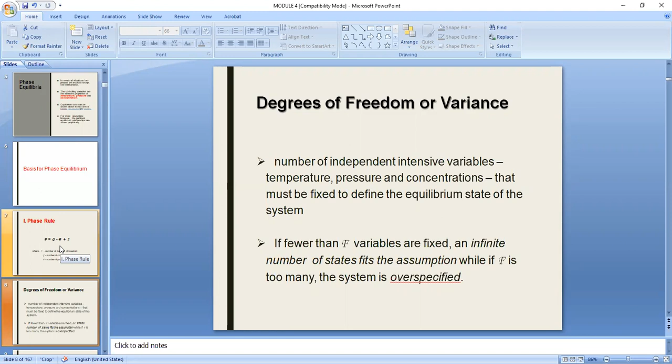Now, while if F is too many, the system is over-specified. So we seldom encounter situations wherein your F is less than or greater than the computed F. Most of the time, we have it given already as to whatever is the computed F. The number of degrees of freedom, or independent intensive variables, really is equal to the computed value based on the phase rule.

Now, for a two-phase system, which is the case in our separation process—we don't cover multi-phase systems—variance is always equal to 2, which is also equal to the number of components in our system.

For example, most of the time the problem has the pressure fixed or specified, and one of the concentrations, either the liquid phase or the gas phase concentration, is given, then the problem would ask for the other one. So if you're given the liquid phase concentration, the gas phase concentration would be asked, or vice versa. In this sense, the number of independent intensive variables is equal to the computed variance.

So in terms of whether it's possible to determine the solution to such a problem, the answer is, of course, yes.

Now we have Raoult's law. This is for ideal systems only. It gives you the relationship between mole fraction in the liquid phase, represented by X, and the partial pressure of A in the gas phase, the small p sub A. Now in some books, the capital P sub A has a naught, so P sub A naught represents the vapor pressure of pure A. Sometimes it's also represented by A prime, so P sub A prime in that sense.

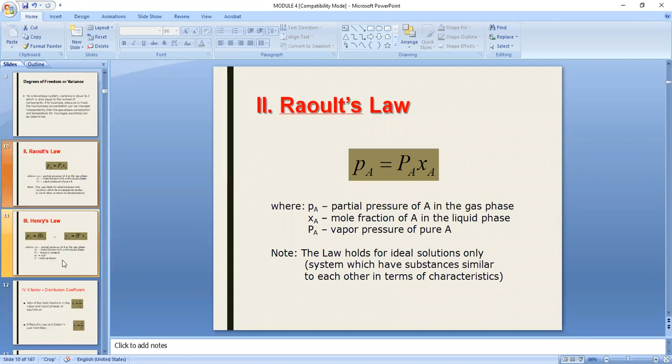Now, if the system is not ideal, we have the option to use Henry's law, which, in lieu of the pure vapor pressure of component A, uses the Henry's law constant. This can also be taken from a property table based on the given system, and using the operating temperature or pressure, whichever is given, we can get the Henry's constant. After that, we can use this equilibrium equation in the problem together with the material balance equations.

Now, from Henry's law, we can derive the relationship between mole fraction in the liquid phase and in the vapor phase, XA and YA. Our Henry's law constant need only be divided by the total pressure of the system. If the problem is silent about the total pressure, it's automatically assumed to be atmospheric pressure. So dividing the original equation of partial pressure and liquid phase mole fraction of component A by the total pressure leads to this equation.

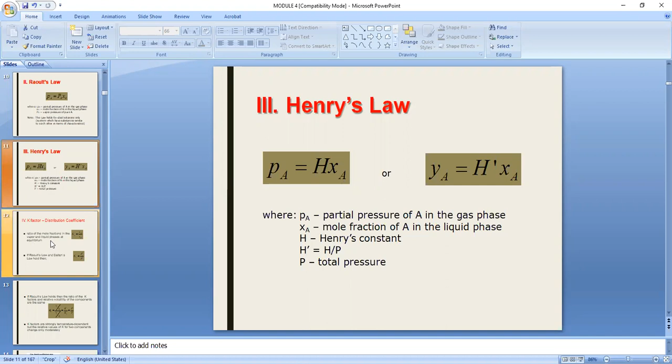The next concept is the K factor, or the distribution coefficient. You'll encounter this in McCabe. This is the ratio of the mole fraction of a particular component—in this formula, component I—in the vapor phase over the liquid phase. So the numerator is the vapor phase composition, and the denominator is the liquid phase composition. Note that the subscript E denotes that these are concentrations measured at equilibrium.

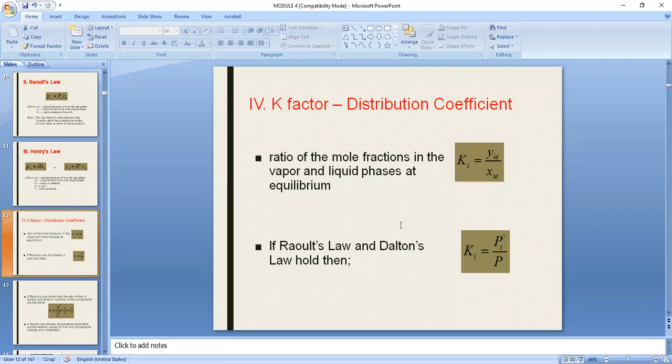Now, if your system is ideal, there's another formula you can use for the distribution coefficient: the ratio of the pure vapor pressure of component I, denoted with a prime, divided by the total pressure of the system. In this case, you're determining the K factor, or distribution coefficient, based on component I.

Again, if Raoult's law holds, we have this relationship between the K factor, or the distribution coefficients, based on components I and J. If we take the ratio of these K factors, that would also be equal to the relative volatility of our system, the relative volatility of component I with respect to J.

If we change the manner of writing the subscripts, say writing J first followed by I, you also interchange the subscripts here and here. Because the manner in which we write the subscript for relative volatility really matters in terms of the formula being used. So for relative volatility of component I with respect to J, if it's alpha sub JI, that's the relative volatility of J with respect to I, which is only the reciprocal of the previous relative volatility.

So you have ratios again of the mole fractions measured at equilibrium. I did not write 'at equilibrium' again since it's implied. It could also be the ratios of the two K factors, or distribution coefficients, or even the ratios of their pure vapor pressures. For this, you really need to know the temperature. K factors are strongly temperature dependent, meaning they change with temperature, but relative values of K for two-component systems change only moderately, or the change is very negligible. So we still consider it to be a constant for a two-component system.

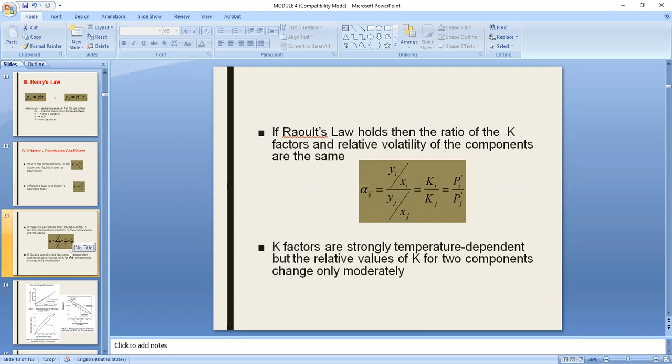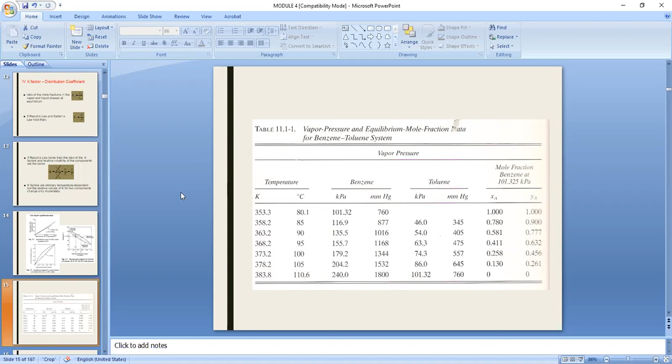So you can either use tables, equilibrium diagrams, or equations. That way you can get relationships between the variables that you want, so you can use these relationships in your material balance equation whenever the need arises.

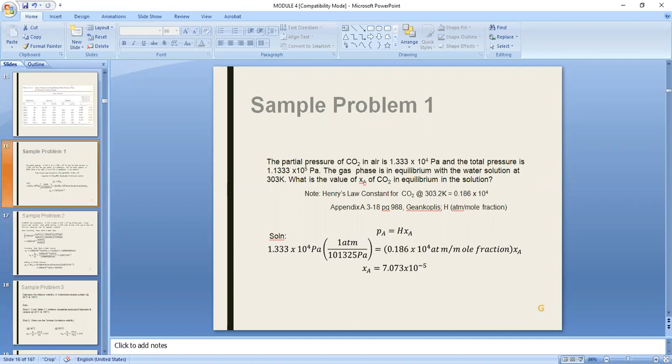I have sample problems here. I'd like to go back to the sample problems when I'm done with everything in this set of slides, that way I've covered everything. So we'll just skip it for now and go back to it when I'm done with the rest.

Now we go to gas absorption and stripping. When we speak of gas absorption, it's the unit operation in which the soluble component of a gas mixture is dissolved in a liquid - your feed is the gas and your solvent is liquid. The inverse of gas absorption is called stripping or desorption. The transfer this time is from the liquid using a gas as solvent, involving the transfer of desired volatile components from a liquid mixture into a gas.

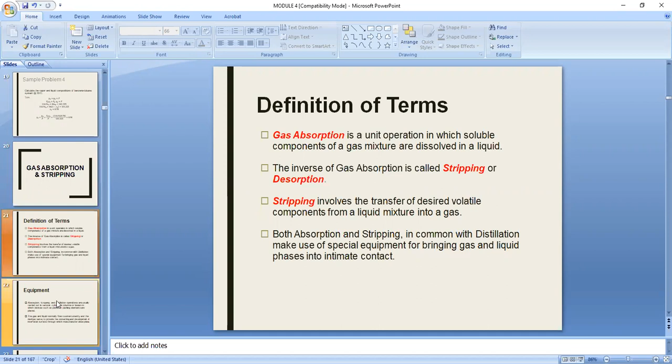Both absorption, stripping, and distillation have something in common in that they use special equipment to bring the gas and liquid phases into intimate contact. So these columns in which these unit processes are carried out can either be in the form of packed columns, tray columns, spray columns, or even bubble columns, all of which are present for the three processes. But oftentimes it's the packed columns and tray columns that are being used. We'll review them later as we reach that particular portion.

Absorption, stripping, and distillation operations are usually carried out in vertical, cylindrical columns or towers in which devices such as plates or packing elements are placed. The gas and liquid normally flow countercurrent, and the device serves to provide the contacting and development of the interfacial surface through which mass transfer takes place. In the process of interacting the phases, there is this development of the interfacial surface where real mass transfer occurs. If the manner of contacting, or the time of contact, is insufficient, there won't be establishment of this interfacial surface, which will of course make separation not 100% or near 100%.

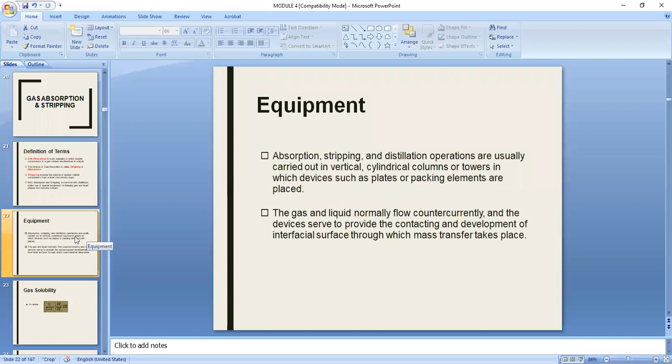Now, for gas solubility, this is an equation taken from the handbook. This allows you to determine the solubility of gas in water. So if the solvent is not anymore water, this particular formula will not work. So this is only for solubility of a particular gas in water.

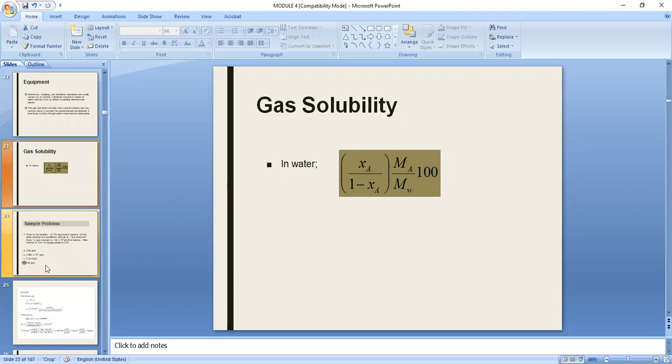So you have here mole fraction of gas A in the liquid phase, and you have the molecular weights of A and that of water. Okay, so how soluble a particular gas is in water only depends on its mole fraction in the liquid phase, because the molecular weights you can anyway take from a periodic table. And we have sample problems here, I will discuss it as well later.

Now, for the equipment selection, plate columns may be economically preferable for large-scale operations. So take note of this, and they are needed when liquid rates are so low that packing wouldn't be adequately wetted. So there won't be enough contact because the liquid rate is small or low, so your packing material will not be sufficiently wetted. So if it's not sufficiently wetted, then there's not enough interfacial surface that will be established for mass transfer to occur.

And that is why for large-scale operations, it's the plate columns that are preferred. So plate towers may have a better turn-down ratio and are less subject to fouling by solids than are packed towers. Now, these packed columns usually are chosen for very corrosive material.

So though plate columns are preferred for large-scale operations, if the material to be handled is corrosive, or if the liquid tends to foam, or it could either be a small or large diameter tower involving very low allowable pressure drop, so there's a need for the operation to be operated at a delta P which is small, then we can use the packed columns.

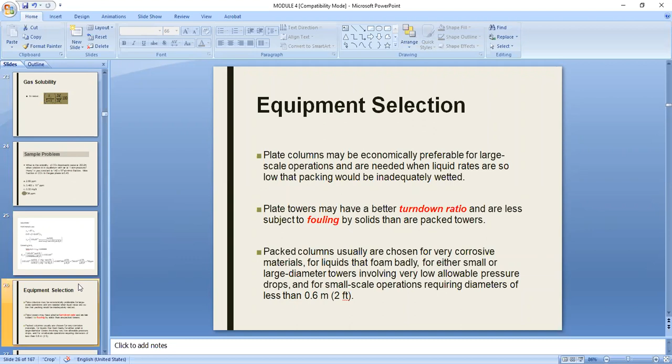So since the plate column is for large scale operation, then the packed column is for small scale operation. Okay, so the diameter is even less than 2 feet. So you can imagine a column with a diameter of less than 2 feet. So take note of the application of the two types of towers or columns for gas absorption.

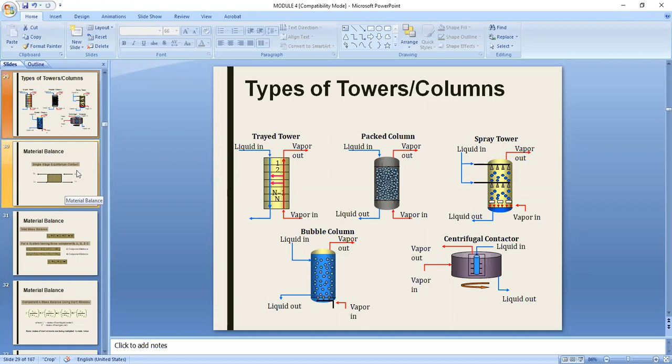When you do a material balance in the case of gas absorption or stripping, if it's just single stage, this is how we label it. Of course, we have L0 and V1 here, and we have V2 and L1 here. The phases that are leaving a particular stage are the phases that are equilibrated. Take note of that. So it's V1 and L1 that are equilibrated when they leave stage 1, or this particular single stage system. Your V2 and your L0 are the feed phases.

So actually your feed is really V2 when you speak of gas absorption, and L0 is your solvent. Vice versa if we talk about stripping. Your feed in stripping is the L, and your solvent is the V.

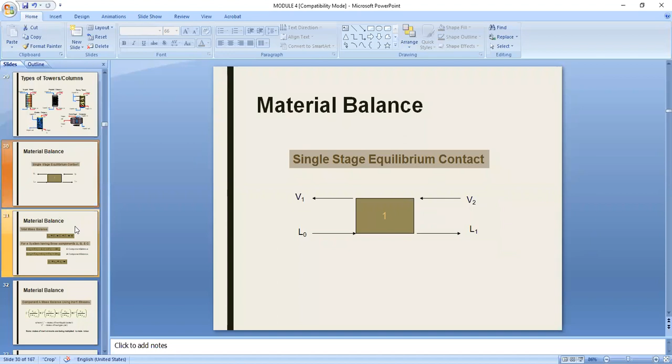Now we do material balance, very simple. You take the sum of the phases that enter your equipment, and you take the sum of the phases that leave your equipment. And we label the resulting phases when these two are mixed as the bulk phase M, where your interface is developed, where real mass transfer occurs.

Now, if you're going to make a component balance, you can only make it based on one component at a time. So if it's based on component C, then let it be C. You cannot make another component balance based on A, because you won't be able to solve whatever is required by using more than one component balance.

The component balance equation, in terms of pattern, takes it from the total mole balance—sorry, not mass balance, but mole balance, because we're using moles here. So your L and V will be multiplied to the mole fractions in the liquid and vapor phases, represented by X and Y. So if your component balance is based on C, then your subscript will have the C. If it's based on A, your subscript will have the A, followed by the number of the plate or stage where this particular phase, where our X and Y is multiplied to, is coming from.

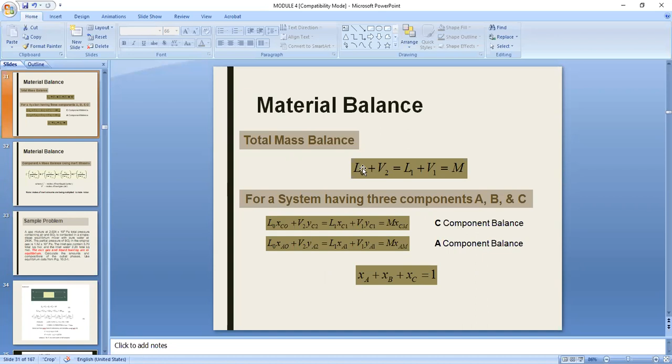This is very beneficial in problems where the original component balance equation will not help us determine all unknowns. So sometimes we use the total mass or mole balance equation, and this one. It's a mole balance, not a mass balance, because we are using moles here in gas absorption.

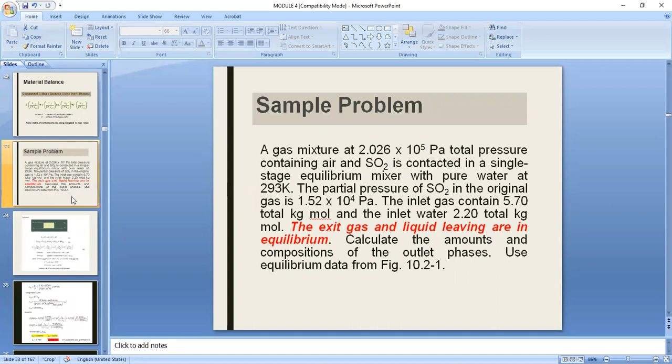This is a sample problem and that's the solution, so we'll skip that and go to multi-stage processes. The material balance shown to you was for a single stage process, but the same principle applies for a multi-stage process.

So you have your stage 1 to stage capital N, and the small letter n refers to a particular stage in our multi-stage process. Notice the labeling is the same as in single stage processes. The streams that leave a particular stage have subscripts equal to that stage number.

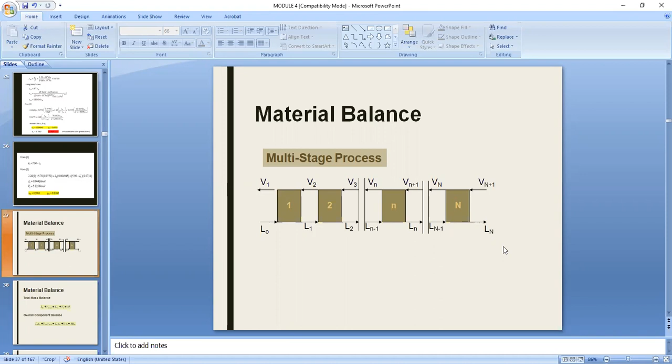These particular streams are said to be equilibrated. So looking at it, if you do material balance, you will have L sub O, V sub N plus 1, and V sub 1 and L sub N. Your component balance would still be patterned after your total mole balance.

Now for a tray tower, this is taken, I believe, from Geankoplis, in the manner the figure is represented. Look at the manner in which the streams are labeled. So this is your material balance in an absorption tray tower. Look at how the phases are labeled and the corresponding mole fractions. So this is our tray tower.

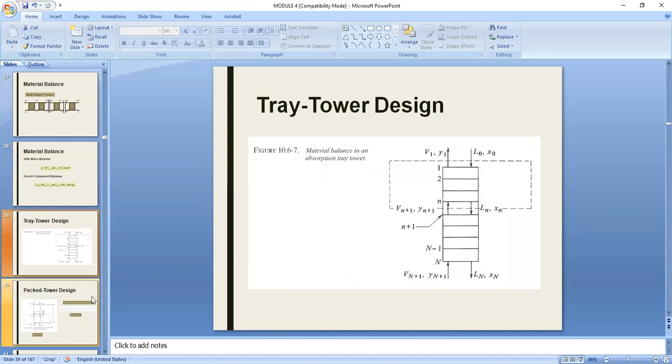Now if it's a pack tower, it's the same as the tray, same labeling, as you can see here. But this time, I took it from Geankoplis again, but he used the representation of McCabe. So Geankoplis also uses the McCabe equation, especially if he intends to use the component material balance utilizing the L primes and V primes, so that he only has to take note of two subscripts in the X and Y.

That is only 1 and 2. Notice at the bottom of the column you have 1, and at the top of the column you have 2. This is how McCabe represents it. This equation is found in your handbook, and I've indicated it here. For the rest of the equations, where I haven't indicated the equivalent in your handbook, please take note of those equations, or I hope by now you've already marked your handbook with the equivalents found in Geankoplis and McCabe, since we're using both.

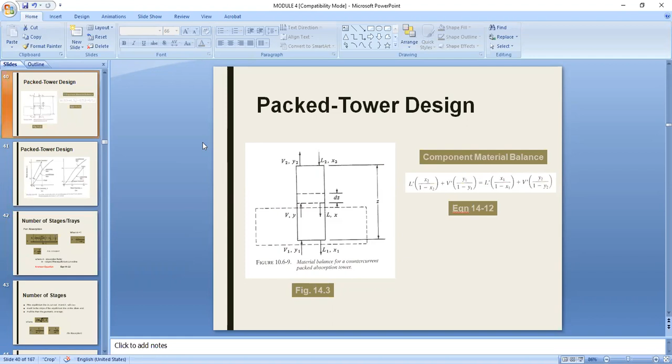Now, for pack column design, we have the graphical approach, wherein you need to write down the operating line for your column. The operating line uses the mole fractions at the bottom and top of the column. Notice the labeling here is again based on McCabe, since you only have X1, Y1, X2, Y2. This is how McCabe labels it. So Y1 and X1 are for the bottom of the tower, and Y2, X2 are for the top of the tower.

Whenever you have plotted your operating line side by side with the equilibrium curve, if it's a gas absorption process, it should be located above the equilibrium line or curve. So this is for gas absorption, and this is for stripping, with the one on top being gas absorption and the one below being stripping. In terms of the location of the operating lines, you use X1, Y1, X2, Y2 as the coordinates for how they are plotted.

Now, how do we determine the number of stages? We will not, of course, discuss the graphical approach here. This is just to pinpoint the location for you.

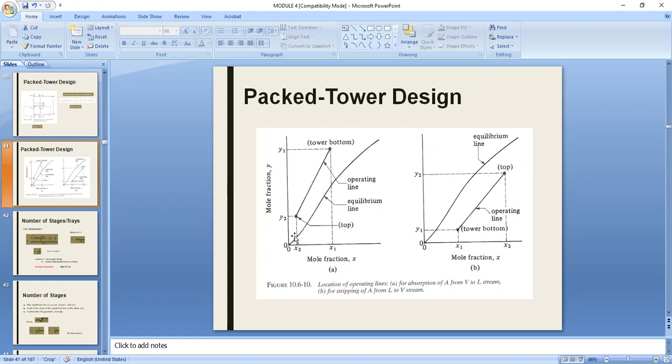What would you do with this? You'd solve separately and get its geometric mean. So you have A1, A2, take the product of that. That should be the A that should be substituted in here.

It is always suggested that if you found out that your A1 and your A2 are just the same, good, then your assumption that you have an operating line, not an operating curve, is correct. If not, then use whatever is the corresponding answer when you get the mean of the absorption factor at the tower bottom and top.

Okay, so that's it in the case of finding the A. So this one is the slope at the dilute end, and this one is the mean absorption factor.

If our A is equal to 1, then we have a simplified manner of determining the number of stages or plates. So it would just be dependent on the mole fraction of the feed gas and that of the gas that leaves the tower, and then the mole fraction of the liquid solvent that is used, because this is XO. Now, when A is 1, when your gas absorption factor is 1, that tells you that your operating line and your equilibrium line are parallel.

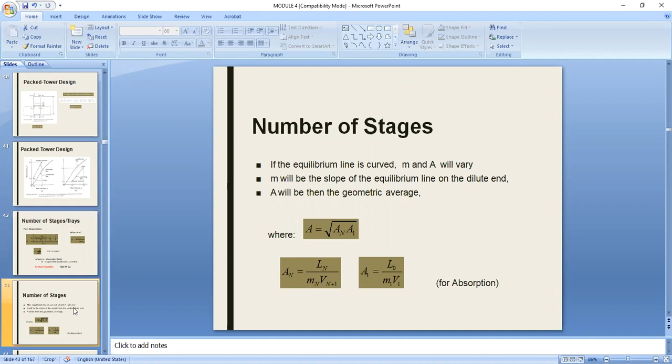For stripping, it's comparable in terms of form to the gas absorption formula. We just change the y's here to x, and the x is changed to y. So this is now your mole fraction of the solvent.

We know in stripping that the gas this time is the solvent. So that is why you have your y sub n plus 1. And your liquid is, of course, the feed. So these are the corresponding mole fractions that you need to substitute here.

Now, the stripping factor is equivalent to 1 over A. So meaning the formula given to you here for A, for stripping factor, that would be mV over L, because your stripping factor S is just 1 over A. So you just take the reciprocal of this.

In the same manner that you have taken the geometric mean of A to check whether your operating line would be straight or curved, you do the same for stripping. So you don't assume that your S at the bottom and at the top of your column will be equal at all times. Just solve for it anyhow—when they are the same, good, you have a straight operating line. If they're not, then you need all the more to consider the variation in the slope, so you need to get the geometric mean.

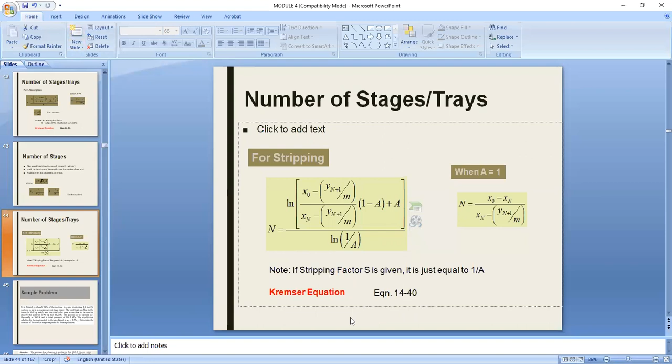The equivalent of the Kremser equation in your handbook is this, equation 14-40, and for gas absorption, it's 14-33. And we have this sample problem here, which I will discuss also later if I'm done with this set of slides.

Now, for the design of the tower, it really depends whether you have a packed tower or a tray tower. So for a packed tower design, requiring you to determine the minimum solvent requirement, what is done actually is this.

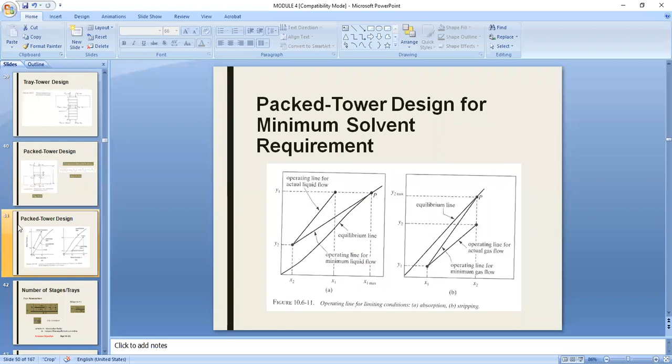How do you determine the minimum solvent requirement? If you go back here, I'll just go back to that equation for easy recall. This one. So if it's the gas absorption, you are actually determining the L prime minimum. This one, the L prime minimum. This you need to substitute properly, and the X1 that you solve, you place it here.

The rest also you place the values. You'll be able to get the L prime minimum. It's different when it's stripping, because then it's your V prime minimum that you're going to determine. Okay, so just place it in here. Oftentimes, class, this is the equation that is being used because it does not require all four phases to be known.

Now, if your liquid phase is not pure water, the L prime minimum that you have here, for example, you already determined the L prime minimum to be, example, 100. If it's already 100, it's not yet the answer. Because if it will require the minimum solvent requirement, and if your solvent has a certain amount of A, for example, it's really requiring you to give the L minimum.

So L minimum times 1 minus XAO is equal to L prime minimum. The amount that does not contain the A is this, right? That's your L prime minimum. So if you got 100 already, then 100 divided by 1 minus XAO will give you the true minimum amount of the solvent, which has the presence of the A.

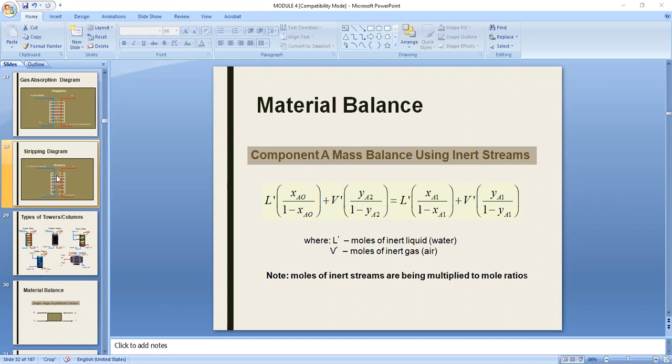The representation here is this one. So then I will project this. The corresponding mole fraction here, which will confuse some, will be YAO. This would be XA1. This would be YAN. And this would be XAN plus 1.

So some will find it confusing, whereas if you simply have 1 here and 2, you need not confuse anything. This will have YA1, this will have XA1, this will have YA2, and this will have XA2. But again, just a suggestion.

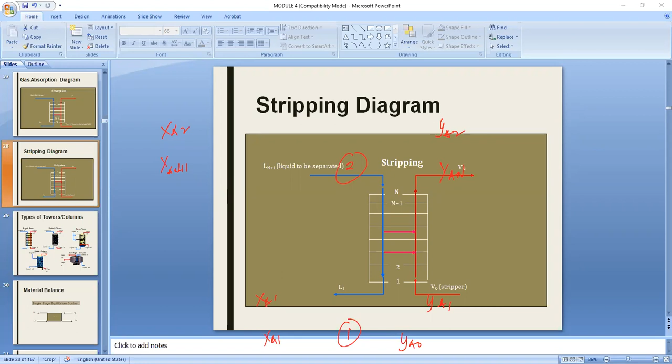That is why even Geankoplis, when he presented the component balance using the inert streams, he's not using this representation. He's using simply the 1 and the 2 subscripts, not the n plus 1 and the 0 subscripts. Okay, so that's it. I will clear my markings here, and then we proceed to the next part.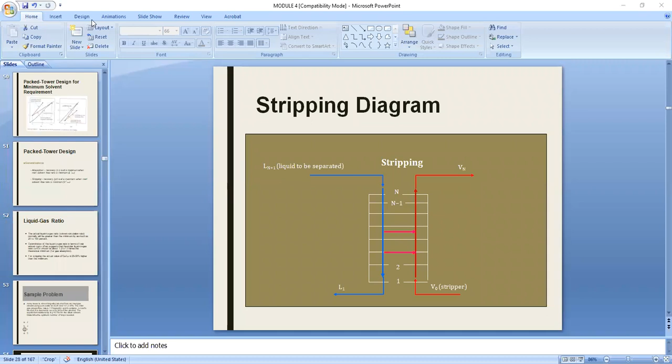So to continue on minimum solvent requirements, here are the generalizations. Recovery X1 in the case of gas absorption is at the maximum when the inert solvent flow rate is minimum. So you are determining based on the component balance equation using the inert streams the L prime minimum only.

So again, to emphasize, if you determine the minimum solvent requirement and your solvent already has the A on it, or the component that is to be taken from the gas phase, then you need to really solve for the L minimum after you have solved the L prime minimum. The same is true for stripping.

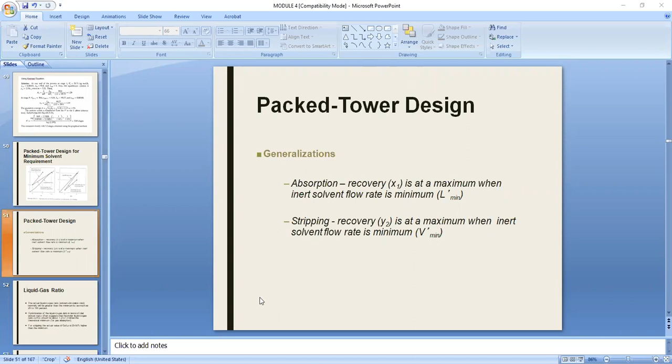So your recovery Y2 is a maximum when inert solvent flow rate is minimum, represented by V prime minimum. The actual liquid to gas ratio, which we call the solvent circulation rate, normally will be greater than the minimum by as much as 20 to 100%. So optimization of the liquid to gas ratio in terms of total annual cost often suggests that the molar liquid to gas ratio, LM over G sub M, should be about 1.2 to 1.5 times the theoretical minimum.

For stripping, the actual value of the G sub M to L sub M is 20 to 50% higher than the minimum, which is the same as that in gas absorption. Again, using 50% more than the computed minimum based on the inert component balance equation.

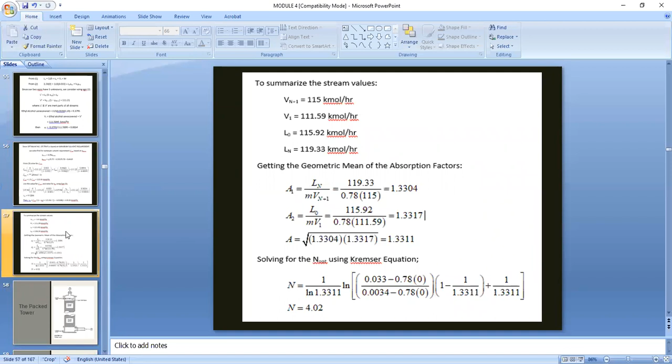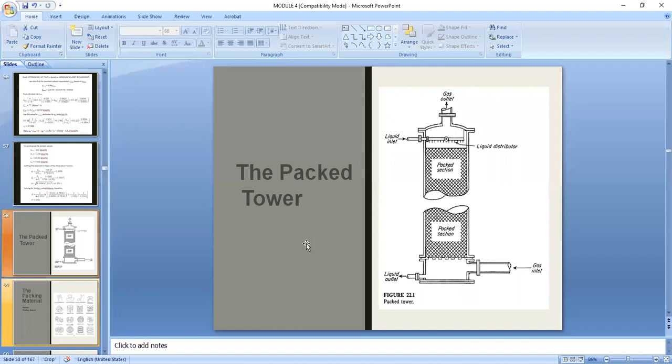To illustrate the use of the concept on determining the minimum solvent requirement, here is a sample problem, and I have already placed in here the solution. Now we go to the packed tower. As to the design of the packed tower, the liquid is introduced here, gas is introduced here, and these are the different random packing materials.

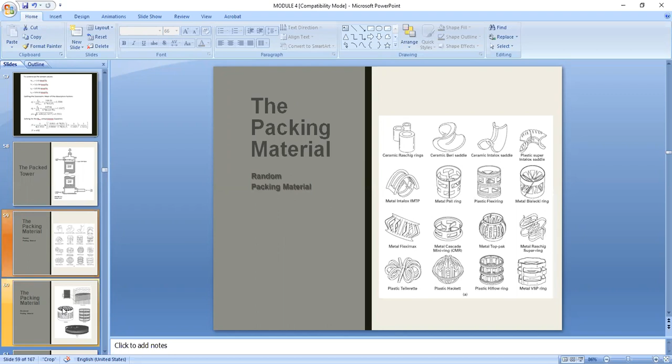If you have time, you can view in YouTube the Chemical Engineering Equipment Encyclopedia. You can search it there, and you'll be able to see in a video the actual packing materials, the random and the structured packing materials, and how they ensure that your phases are contacted. So these are your random packing material, and these are your structured packing material.

As for the tray tower, you have the trays, there's no need for the packing materials. I mentioned already that this is the downcomer. The liquid flows in this manner, going down here, horizontally in here, and in here. So the gas flows upward.

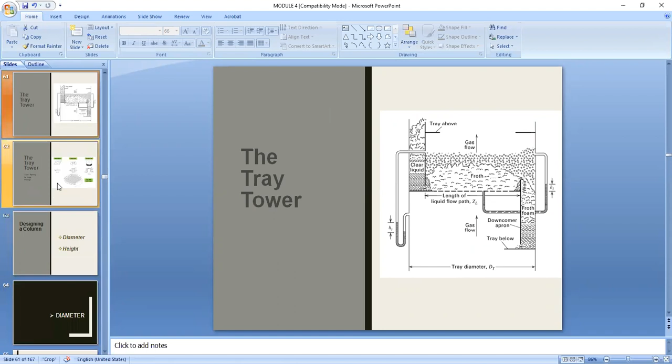As for the tray tower, the openings can either be in the form of perforations, in the case of the simple sieve tray tower. It can also have the valve caps, and it can have the bubble caps. This is an example of a tray with valve caps. You'll be able to see videos on YouTube on how these different types of openings in your tray tower operate. Now let's go to the design of the column.

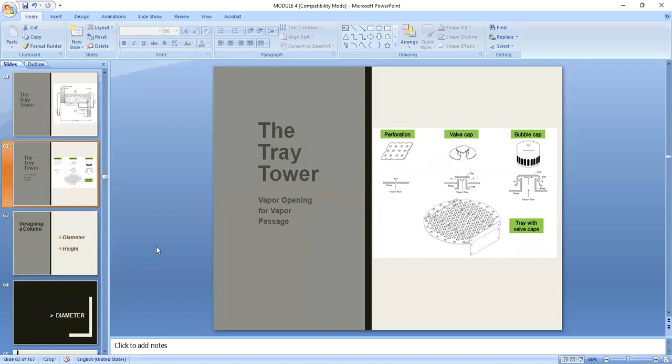In designing our column, whether it's the absorption column or the stripping column, we are interested in determining the diameter and the height of the column. So let's first know the procedure in determining the diameter.

For the diameter, we need to determine the pressure drop. In Geankoplis, there's a need for us to determine the pressure drop, the flooding velocity, and ultimately determine the tower diameter. This is for a packed tower.

The usual design is 60 to 80% of the flooding velocity being used. In this class, in the range of 60 to 80%, we're using the least value in the range, which is 60%. If you can recall, we determine the flooding velocity and we multiply it by 60%, and that's our basis for our tower diameter.

There is a sample problem as well in Geankoplis on how we determine the tower diameter using 60% of the flooding velocity. Associated with the flooding velocity and the tower diameter is the determination of the pressure drop.

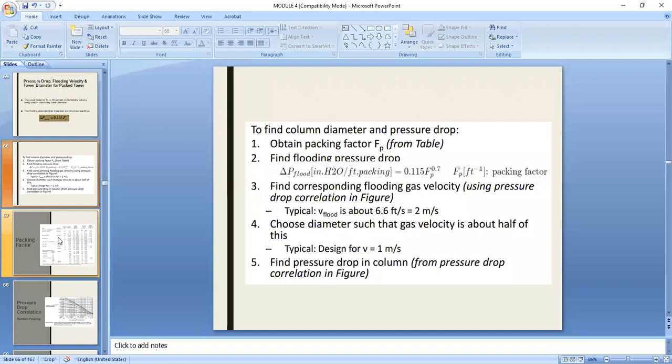The table that I was mentioning, which is more detailed, is this one, if I can project this in your handbook. On the upper portion you have the random packing, and here you have the structured packing, and one of the columns here is the packing factor, this one. One unit is per foot, the other one is per meter, depending on the set of units that your problem is working on.

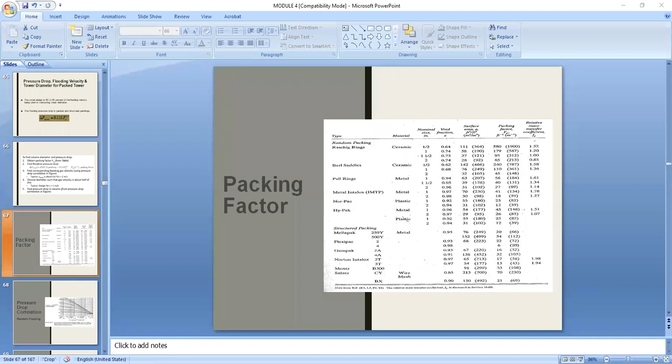In your handbook, you have this also. And for the pressure drop correlation, I'd like to project this.

For random packing, we determine the flow parameter, I hope you still remember. From the pressure drop correlation, we have these values. If the value you got is not among the curves shown, just approximate the curve. Then you'll be able to determine the capacity parameter, and from that get V sub G, the linear velocity at flooding. Multiply it by 0.60, and that's the value used in determining the diameter of the column. So this is for random packing material.

You also have one for structured packing material, but it's the same procedure. You determine the flow parameter to get the capacity parameter. This one is for structured packing, and just like mentioned earlier, these are your delta P curves. First determine the delta P as suggested in the steps for determining the diameter of your column, to get the flow parameter, then the capacity parameter, then the linear velocity at flooding.

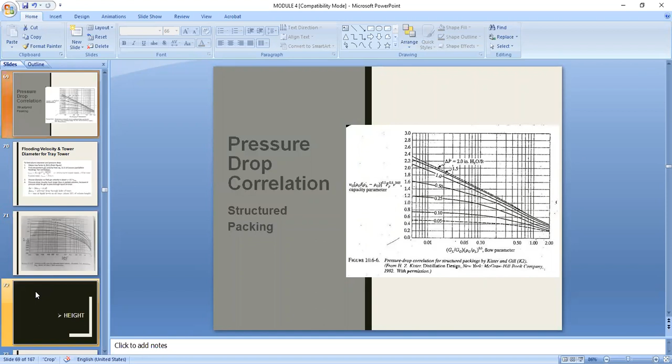What about for tray tower? This procedure given here, which needs the delta P to use the flooding correlation diagrams, is only for packed tower. So if it's a tray tower, this would be the procedure in determining the diameter.

Obtain the tray factor, K sub V, from the figure given in Geankoplis. Find this table's equivalent in your handbook. Instead of the delta P in the curves, you have the tray spacing here. With the tray spacing and the value solved beforehand, you can get K sub V in step 1 as stated here, the tray factor.

Sorry, my internet is unstable. Then find the entrainment gas velocity from equation 11.5-14.

This occurs just before flooding, using the Fair correlation, and this is the formula. If you saved the set of slides given to you last year in the topic of gas absorption and stripping, you will see the same formula shared there. The typical value for the maximum linear velocity for tray towers is 3 meters per second, so the value you should be able to solve will be within this range.

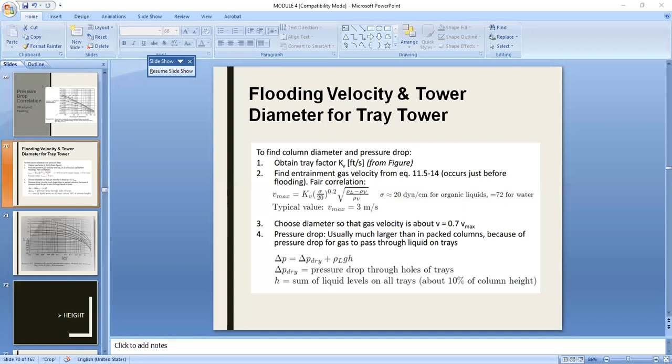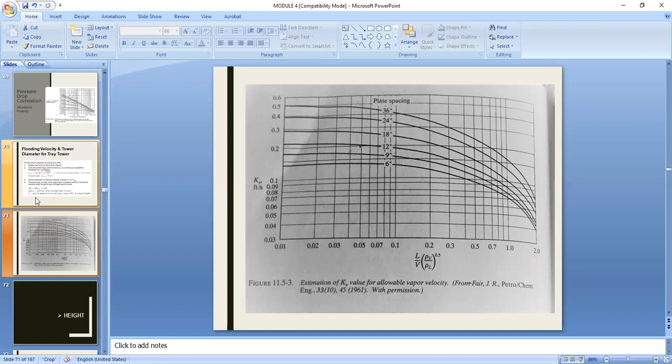You'll see a sample problem on this in Geankoplis on the use of the flooding velocity to determine the diameter of a tray tower, so please check on that. And this is the particular diagram where you can get the tray factor. Now that's for the diameter.

As for the height of the column, we have many formulas depending on the particular service where the column is used. But nonetheless, in terms of height, if you use Z as the representation for height, whether of your absorption tower or stripping tower, you have these choices: H sub G, N sub G, H sub L, N sub L, or if it's based on the number of overall liquid phase or overall gas phase transfer units, you will use H sub OG or H sub OL. You can find this in equation 14-15 in your handbook.

The NOG and the NOL, the number of transfer units overall in the gas phase and liquid phase, the equation for NOL is comparable to the Kremser equation we discussed earlier. If you have these two, you just multiply with the HOG and the NOG.

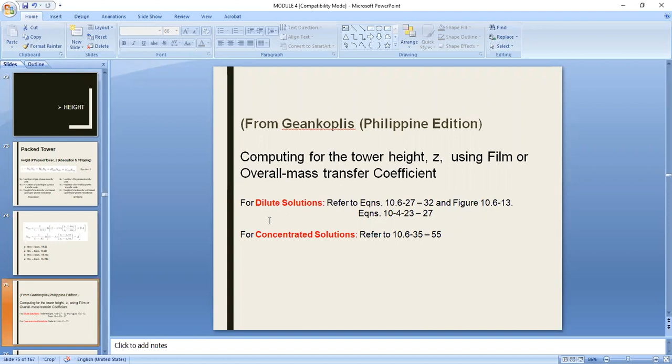Now, the HETP is used for packed towers. HETP is defined as the height of packing equivalent to one theoretical stage, meaning the height of the packing material used which is equivalent to one theoretical stage.

For HETP in terms of the HOG, if you already have the HOG, you just need the absorption factor. You also have the NOG in terms of the absorption factor and the theoretical number of stages. So if you've determined the theoretical number of stages, you can determine the NOG.

If you have the HOG, you multiply the two to get Z. But if you want to convert from HOG to HETP, since HETP uses only the theoretical number of stages to get Z, you use HOG to convert it to HETP. Then, with N, you can also determine your tower height or column height if you have a packed tower.

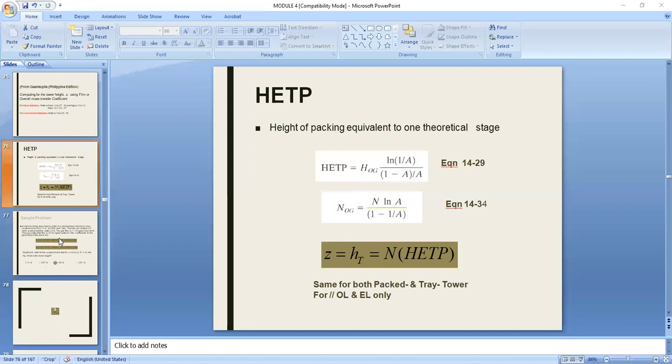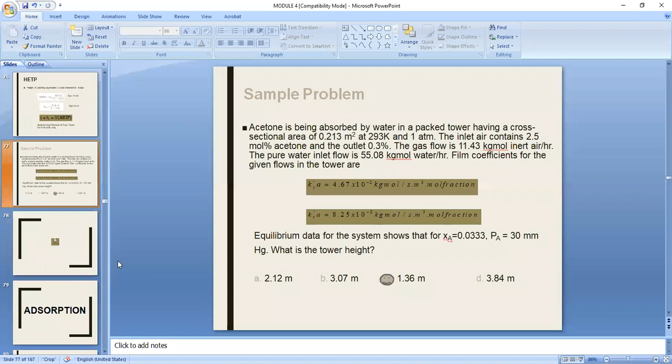You have this sample problem on the determination of the tower height, and the detailed solution to this problem is here. If I share it with you, clicking this gives you the corresponding PDF file, but I will also share the file separately just in case you can't open it later when shared in Canvas. That's the sample problem for determining tower height.

Since you already have ample examples in Geankoplis on determining the diameter for your packed or tray tower, we won't go over that again here.

Now we go to the last topic in this set of slides—actually, second to the last. We go to adsorption. Adsorption is not the same as absorption, which is why I discussed this right after absorption.

Adsorption is a process in which a component of a gas or liquid is adsorbed on the surface of the adsorbent. The adsorbent is usually placed in a fixed bed, and the component to be adsorbed is fed onto the bed so that the components need only be adsorbed on the surfaces of these adsorbents.

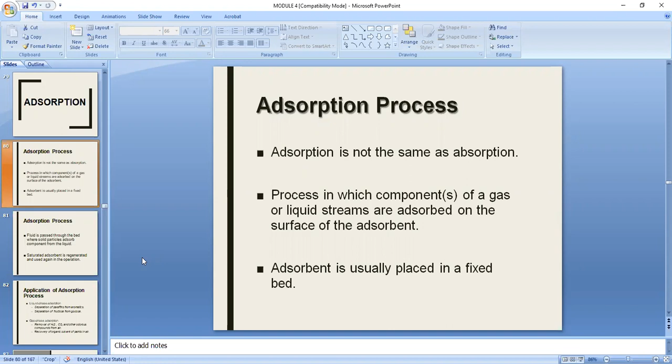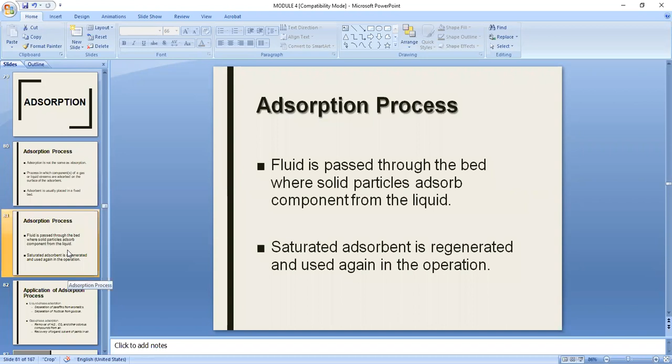The fluid is passed through the bed where solid particles adsorb the component from the liquid, and the saturated adsorbent is regenerated and used again in the operation. So there is regeneration of the solid adsorbent so it can be used again.

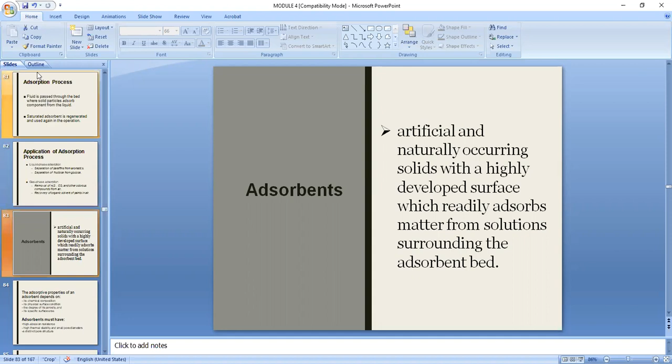These are just one of the many applications of adsorption. As for the adsorbents, they are what accomplishes the process of separating the component from the liquid or gas phase. These are artificial and naturally occurring solids with a highly developed surface, which readily adsorbs matter from solutions surrounding the adsorbent bed.

The adsorptive properties of an adsorbent depends on its chemical composition, its physical surface condition, the degree of its porosity, and its specific surface area. So how well the adsorbent performs its duty depends on these four factors.

Adsorbents must have high abrasion resistance, high thermal stability so even if the corresponding temperature changes it should remain stable, and small pore diameters. They should also have distinct pore structures. These should be their characteristics.

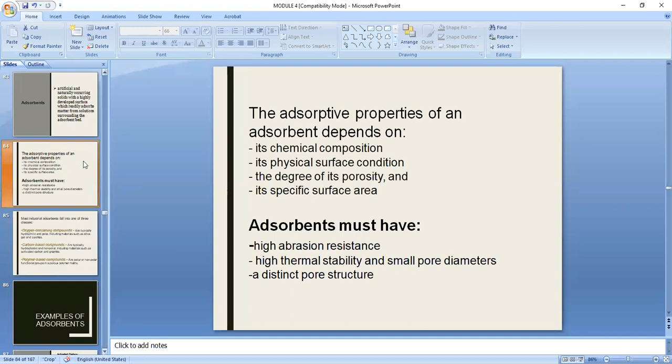Most industrial adsorbents fall into one of three classes. Oxygen-containing compounds are typically hydrophilic and polar, including materials such as silica gel and zeolites. Carbon-based compounds, on the other hand, are typically hydrophobic and non-polar, including materials such as activated carbon and graphite. What about polymer-based compounds used as adsorbents? They have either polar or non-polar functional groups in a porous polymer matrix. So these are the three types of adsorbents being used.

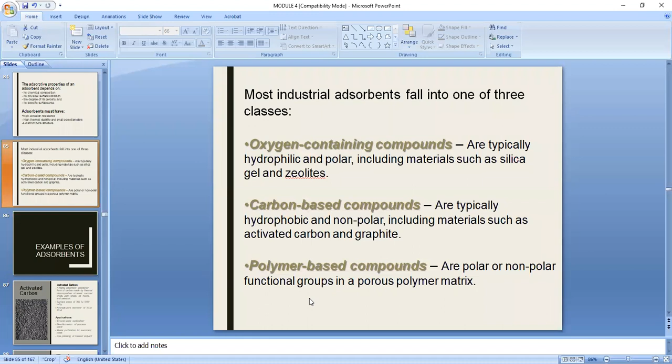Let's look into them one by one. Activated carbon is not costly and common. It's a highly adsorbent powdered form of carbon made by thermal decomposition of wood, coconut shells, palm shells, oil, husks, and sawdust. Surface area ranges from 300 to 1,200 square meters per gram with an average pore diameter of 10 to 60 angstrom.

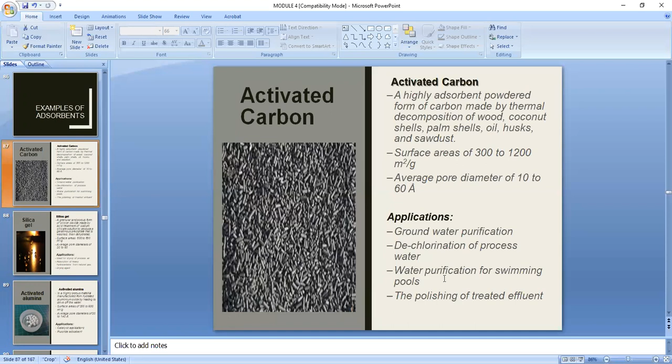Applications include groundwater purification, dechlorination of processed water, water purification for use in swimming pools, and the polishing of treated effluents. The second most popular is silica gel.

We have this in packagings actually. These are granular and porous forms of silicon dioxide made by acid treatment of sodium silicate solution to produce a gelatinous precipitate that is washed, then dehydrated. Surface area is even higher, 600 to 800 square meters per gram, with an average pore diameter of 20 to 50 angstrom. I forgot to place the unit.

Applications include drying of processed air, adsorption of heavy hydrocarbons from natural gas, and most of the time it's used as a drying agent.

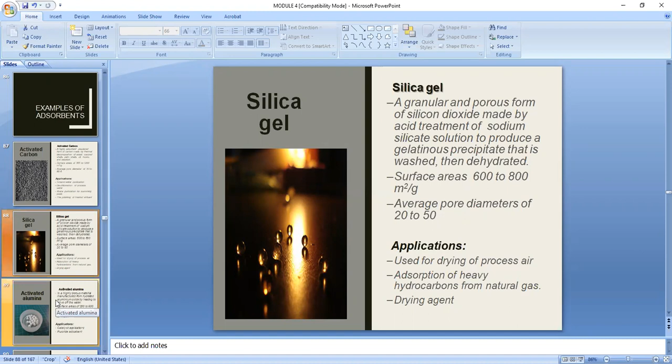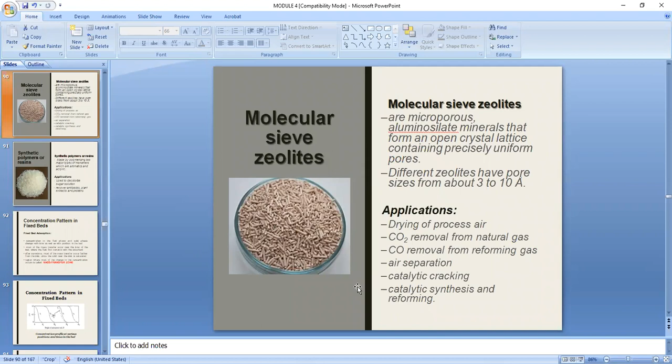Applications are in drying of process air, CO2 removal from natural gas, CO removal from reforming gas, air separation, catalytic cracking, and catalytic synthesis and reforming.

The last here is synthetic polymers or resins. These are made by polymerizing two major types of monomers, which are aromatics and acrylic. They are used to decolorize sugar solutions, and for the recovery of antibiotics from plant extracts, and proteins.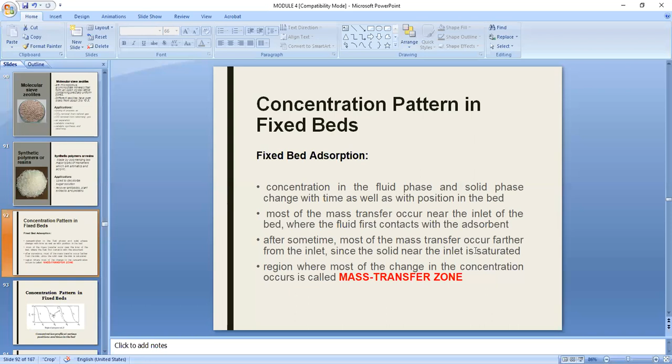The region where most of the change in concentration occurs is the mass transfer zone. This is the concentration profile in fixed beds. You have here the height of adsorption in the bed: height 1, height 2, height 3, and height 4, with height sub T total measured from zero height. This is the ratio of the concentration at any particular time T over the initial concentration, and the profile goes like this.

At this particular portion, you have the ratio of the equilibrium concentration to the initial concentration of the phase to be processed in the bed. And here is the corresponding time for this particular height to be saturated: this is T sub 1 for this height, T sub 2, T sub 3, and T sub 4.

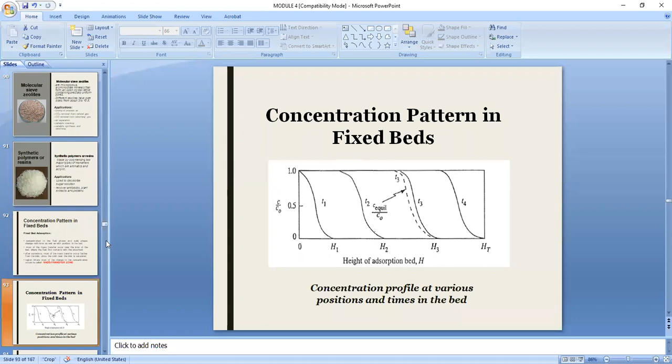The breakthrough point is mentioned in the process of adsorption. That is the point wherein the maximum concentration can be discarded. Here, 0.01 to 0.05 of the feed concentration is already discarded. That's the breakthrough point.

Now, what are the very important adsorption principles you are to take note of? Since the width of the mass transfer zone does not change, the effect of moderate changes in the feed concentration on the breakthrough point can be determined.

Adsorbers are scaled up from laboratory tests in a small diameter bed, and the large unit is designed for the same particle size and superficial velocity. So what is done initially, class, is the process of adsorption is first done in the lab, then it's scaled up using the same particle size and superficial velocity.

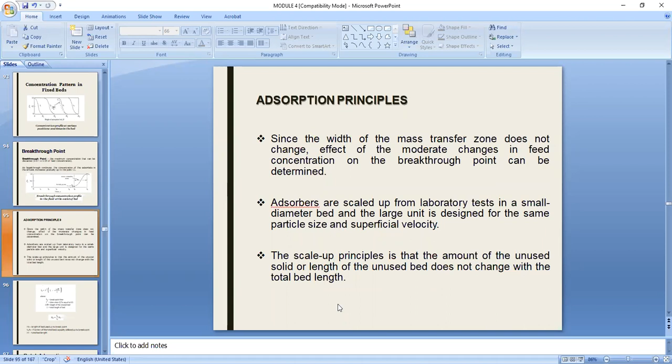The formula you can use here determines the breakpoint time - this is the time wherein you already have 1 to 5% of solids present in your adsorbate.

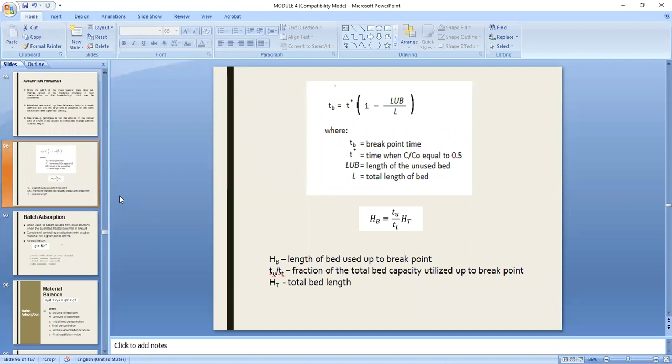Now, in terms of adsorption, we have batch adsorption. This is often used to adsorb solutes from liquid solutions when the quantities treated are just but small. It consists of contacting an adsorbent with another material for a given period of time.

At equilibrium, Q is the amount of the solute adsorbed per amount of adsorbent, or how much of the solute gets adsorbed per unit amount of adsorbent used.

K is a constant determined experimentally. This has to be provided in the problem if there is no experimental data given to you to interpret. N is also a constant, determined experimentally just like K, and C is the solute concentration in solution. This is actually very comparable to the rate law in kinetics.

This is your rate, and this is your concentration. This is your rate constant, and this is the order of the reaction. Both the rate constant and the order of the reaction are determined experimentally.

If you recall our discussion last year, in determining K and N, we are provided with a pair of data, Q and C, and the treatment is very much similar to being given the rate and the concentration in kinetics. That way we can find N and K.

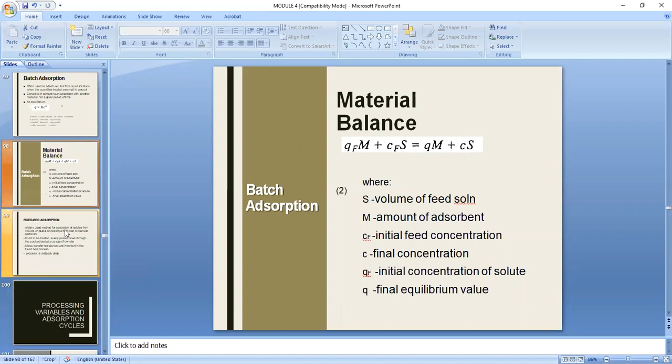Now we go to fixed bed adsorption. This is a widely used method for adsorption of solutes from liquids or gases employing a fixed bed of granular particles. The fluid to be treated usually passes down through the packed bed at a constant flow rate.

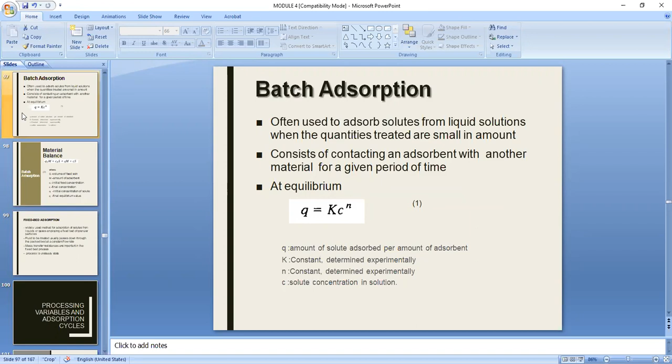So the previous equation is for batch adsorption - one passing through, where your phase to be treated with the adsorbent is placed into your adsorber. This one is continuous, because your fluid to be treated usually passes down through the packed bed at a constant flow rate. Mass transfer resistances are important in the fixed bed process, and the process is unsteady state.

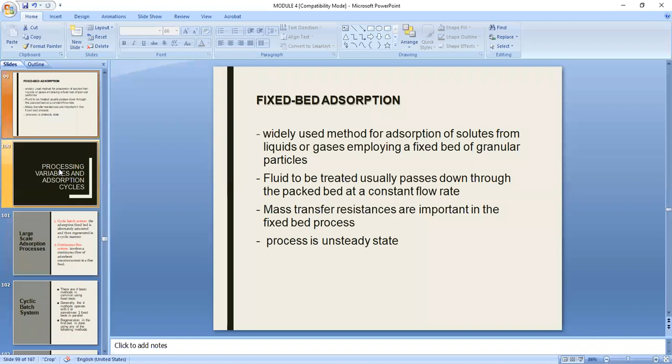Now, associated with this adsorption class are the adsorption cycles, and you need to be acquainted with these adsorption cycles along with the processing variables.

For large-scale adsorption processes, if we have the cyclic batch system, the adsorption fixed bed is alternately saturated and then regenerated in a cyclic manner. Meaning we pass the feed to be treated through it. Then once the adsorbers are saturated, it's being regenerated. Then once it's regenerated, it's being used again. So that is why it's a cyclic process - saturated, then regenerated, then saturated again, then regenerated.

For continuous flow systems, this involves a continuous flow of adsorbent countercurrent to the flow of the feed. In this case, both your adsorbent bed and your fluid to be processed flow countercurrent to each other continuously. This is in the case of large-scale adsorption processes, so the batch system uses the saturation-regeneration cycle.

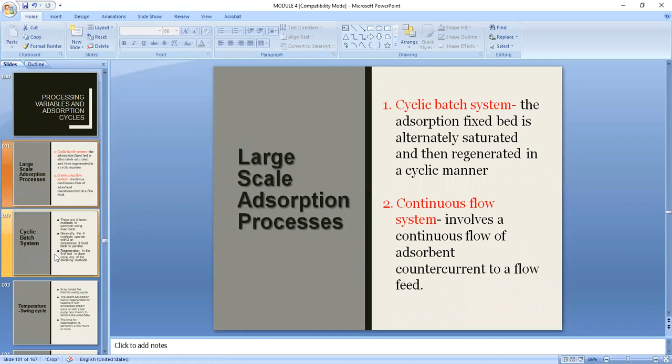Now we go to the cyclic batch system mentioned here. There are 4 basic methods commonly used in fixed beds. Generally, the 4 methods operate with 2 or 3 fixed beds in parallel. Regeneration in the first bed is done using any of the following methods.

Since the cyclic batch system uses the saturation, regeneration, saturation cycle, what are the procedures of regenerating the adsorbents in the bed? These are referred to as the adsorption cycle: the temperature swing cycle, the pressure swing cycle, the inert purge gas stripping cycle, and the displacement purge cycle. This is how our beds in the cyclic batch system are regenerated so they can be used again.

Okay, so let's go to the temperature swing cycle, also called the thermal swing cycle. The spent adsorption bed is regenerated by heating it with embedded steam coils or with a hot purge gas to remove the adsorbate. Since it's already saturated, meaning all exposed surfaces already have adhering solute particles, these adhering solute particles need to be removed so that your adsorbent can be used again. This is done through the use of embedded steam coils or a hot purge gas stream.

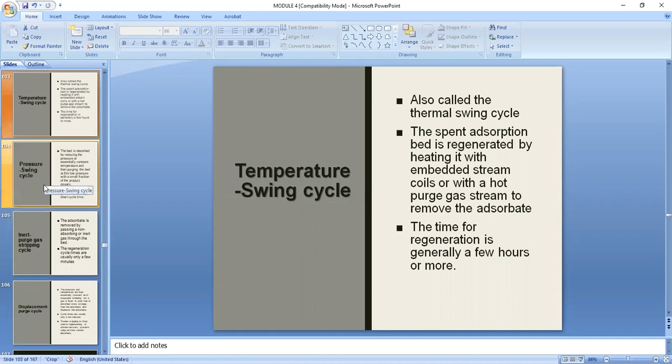What about the pressure swing cycle? Take note of the differences between these different regeneration processes for your cyclic batch system. The bed is desorbed by reducing the pressure at essentially constant temperature, then purging the bed at this low pressure with a small fraction of the product stream. This process for gases uses a very short cycle time. So the pressure swing cycle is used for gases adsorbed on adsorbents, and it reduces the pressure at constant temperature, after which the bed is purged with the product stream - that is, the adsorbate that was discarded already. The time here is short, unlike the temperature cycle.

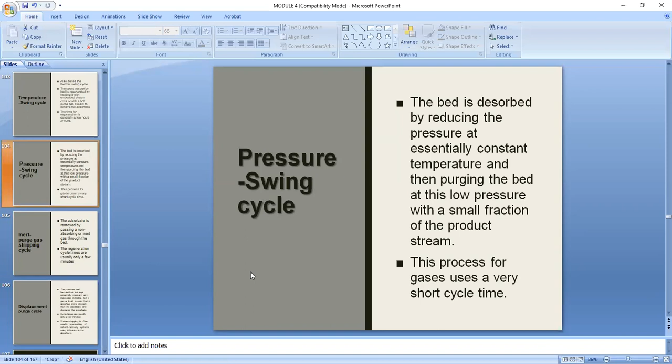What about the inert purge gas stripping cycle? The adsorbate is removed by passing a non-absorbing or inert gas through the bed. So you were using here not a heated stream, but rather an inert gas that will remove the adsorbate in your adsorbents. The regeneration cycle times here are usually only a few minutes. Of course, the amount of inert, non-absorbing gas must be considered, because this is another cost, since you need to look for an inert non-absorbing gas to remove your adsorbate.

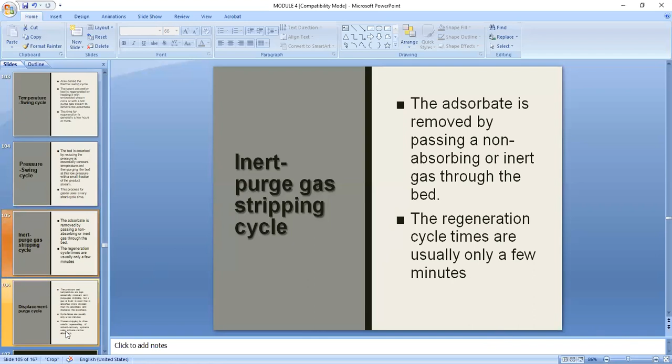In the 3 cycles discussed so far, this one is the only one that specified that your cycle time is just a few minutes. Now we go to the last one, the displacement purge cycle.

The pressure and temperature are essentially constant, so it's a modification of both the temperature and pressure swing cycle, because this time both temperature and pressure are kept constant. This is similar to the purge gas stripping, but a gas or liquid is used that is adsorbed more strongly than the adsorbate and displaces it. In terms of defining this particular cycle, the term displacement is really appropriate, because an adsorbing gas or liquid is used that will displace the adsorbed solute in your adsorbent.

So cycle times are usually only a few minutes. Steam stripping is often used in regenerating solvent recovery systems using activated carbon. The other term for this is steam stripping, and it's used in the recovery of activated carbon as adsorbent.

Okay, now we will continue with the rest of this. My time is 11:27. I'll be discussing the Langmuir isotherm and the Freundlich isotherms in adsorption. Then we go to extraction. The next set of slides will be focused on distillation and, if I'm not mistaken, leaching already.